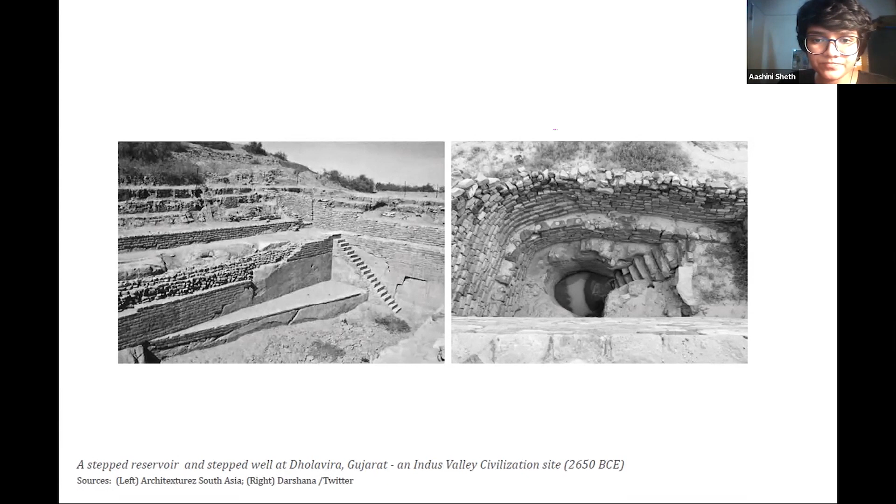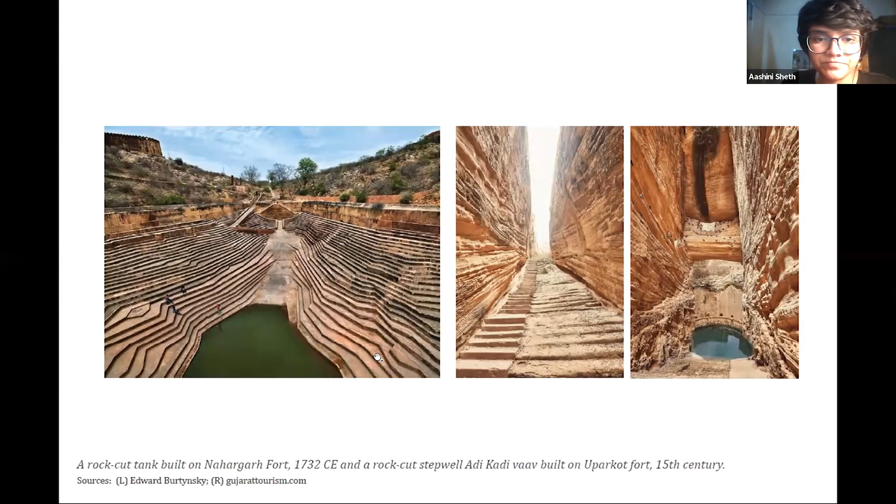However, in this context, it's important to acknowledge that the architectural vocabulary of water structures that evolved in this region is not exclusively for surface water and groundwater. We have a whole range of structures that navigate different kinds of water sources. So from this point on, I'm going to take us through a journey from surface water to groundwater and everything in between.

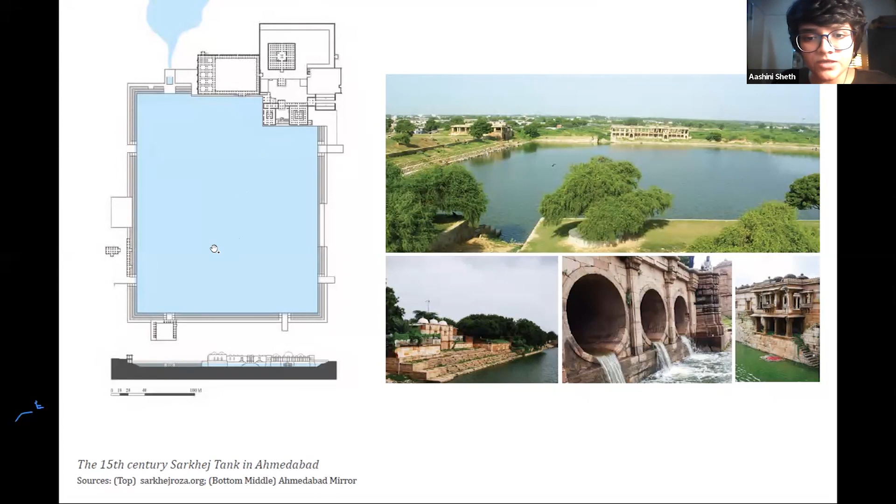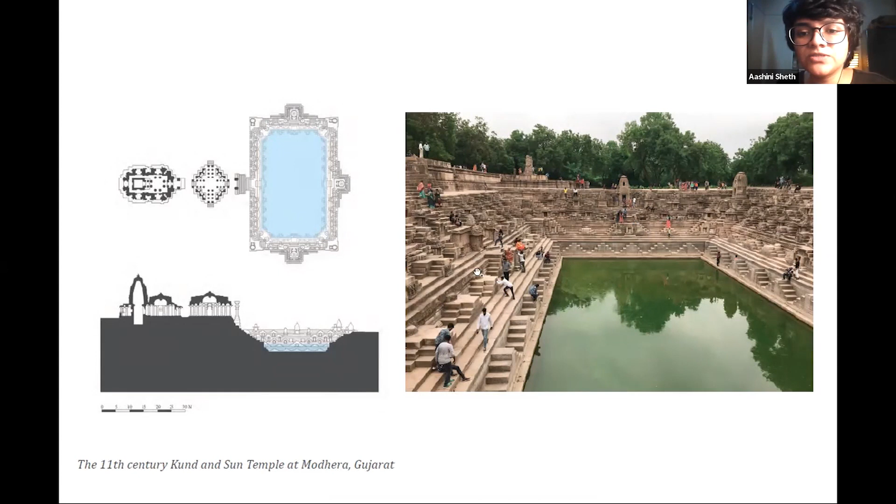This tank is situated in a pretty elaborate architectural setting, next to a complex of temples, and it has little miniature shrines erected all over the landings and steps of the tank. The repetitive, rhythmic movement of the steps also alludes to the ritualistic aspect of pilgrims circumambulating the tank and visiting each shrine as they go along.

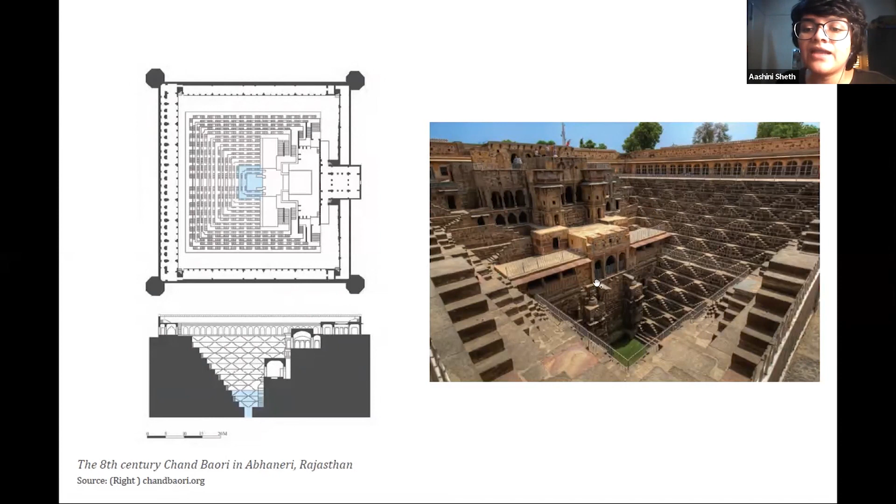This is another alteration of the kund. The structure is similar—it has these terraced, stepped walls—but it's a whole lot deeper than the last structure we saw, again in an effort to lose less water to evaporation as you increase depth but reduce surface area. This structure actually has a little shaft of groundwater. So it collects rainwater during the monsoon, and as the rainwater evaporates over time, one can still walk down to the greater depths and access the water that comes out of the ground.

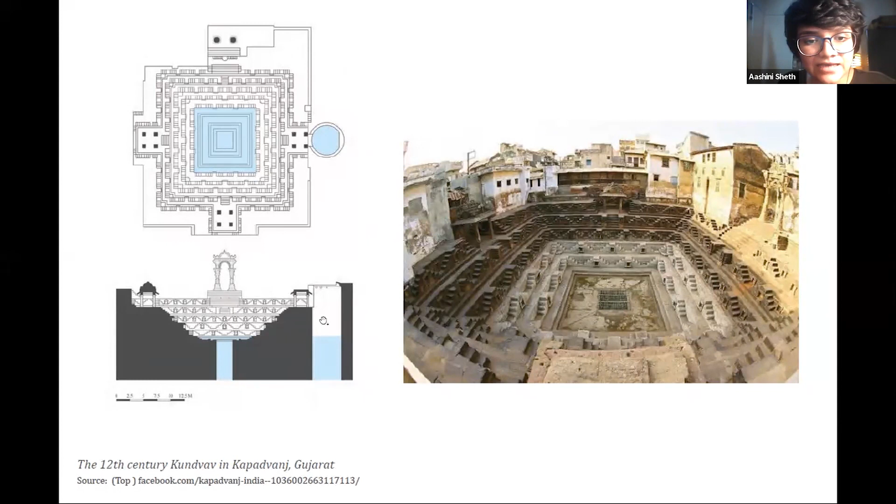This is another example of a kund, in Kapadvanj, Gujarat. It's similar to the Modhera tank in depth, and again has a lot of little niches and shrines carved into it. There is a monumental gateway which sets the stage for the tank. But you can see it has two attached well shafts—one at the base of the tank itself, and one built around one of its sides. So here the tank and the well begin to take on two very distinct identities.

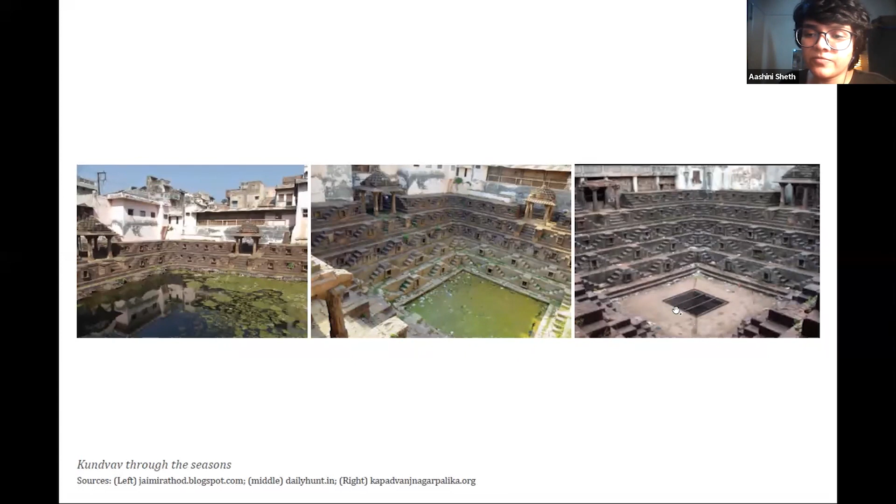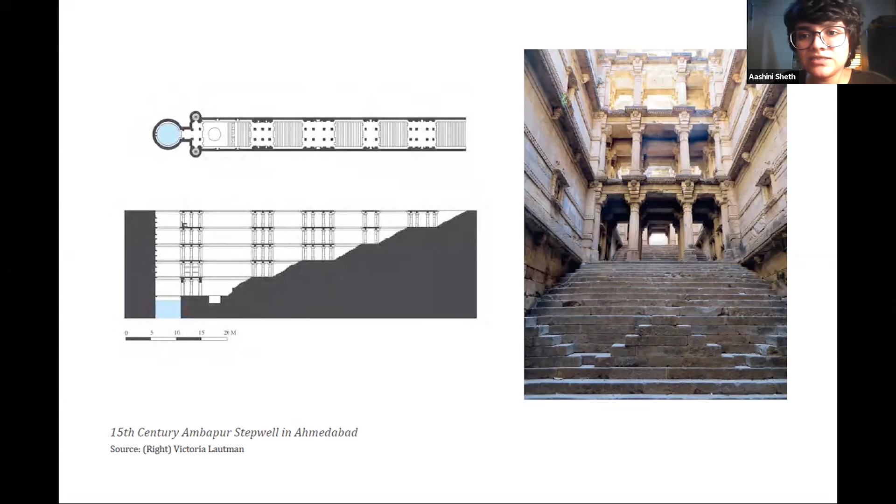There you don't see the sculptural splendor that you did with the previous well in Patan.

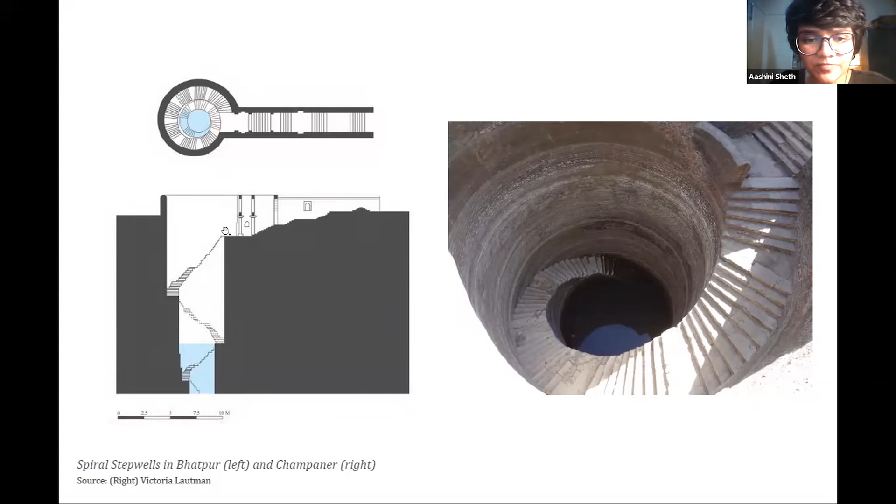This is the well form as it gets even simpler and more rudimentary. What you see here is a step corridor which, as it reaches the well shaft, begins to spiral helically within itself. So the component of the stepped corridor is becoming less imposing. And finally, here we see the spiraling taken to its epitome.

This is a well known as Hario Kuo in Halisa, Gujarat. Basically what you have here is a spiral stepped corridor that winds around the well shaft, and there are these little balconies that look in towards the well. So it's a very insular, very private expression compared to these large public stairways that we saw in the previous versions.

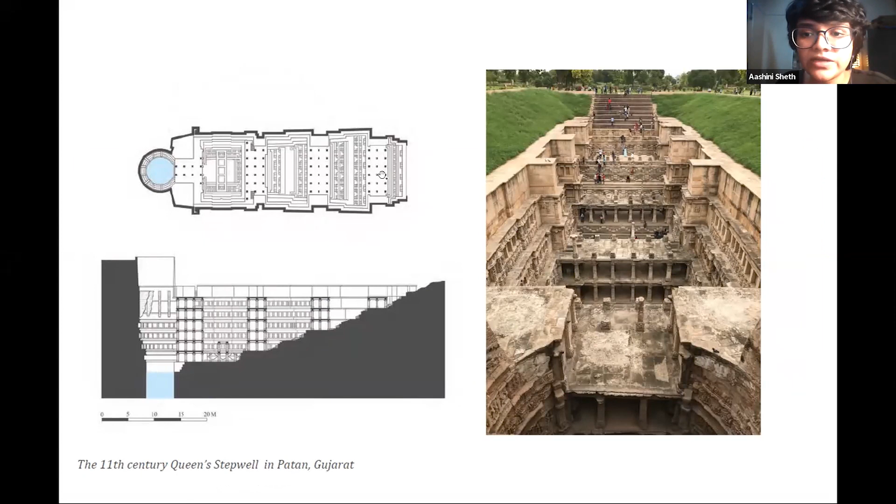Also, with previous step wells, for example the Rani Ki Vav, you can see how the step corridor is quite large, broad and deep, so it has a lot of potential even for holding rainwater when it rains in the monsoon. But with something like this, its scope has been reduced to merely acting as a well. It does not have much scope for storing water like a cistern, the way the Rani Ki Vav, the Queen Stepwell, would have done.

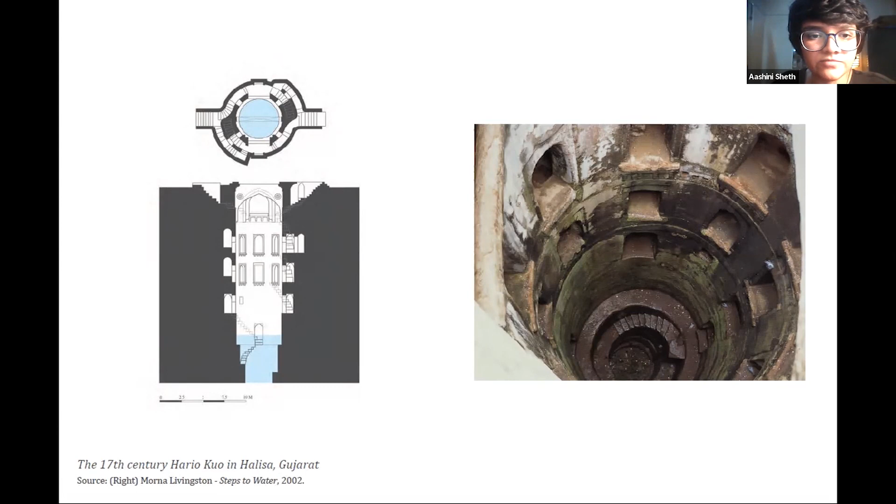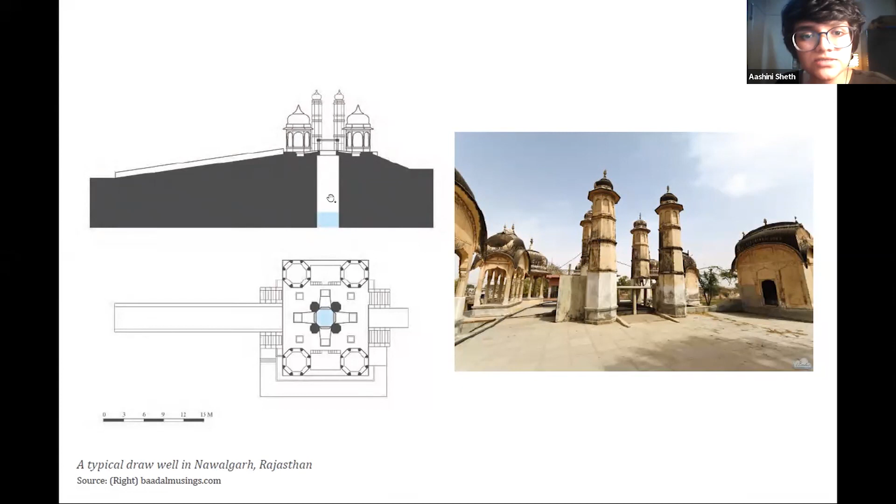Finally, here you see a very simple, rudimentary draw well. All you have is a cylindrical shaft that goes into the ground, and this is very typical of the Shekhawati region in northern Rajasthan, which tends to be much drier and more arid than Gujarat. You have these long ramps for a draft animal like a camel or a bullock, which would drag a rope with a pulley and pull large quantities of water out of the well. So you begin to see an inversion in the section — instead of a section that goes in towards the water, here it's a different expression which is more outwardly.

Finally, what we see here is a rainwater cistern — basically a tank excavated beneath the foundations of vernacular house forms in certain cities in Gujarat, like Ahmedabad. The typical vernacular house form typology in Ahmedabad tends to be these courtyard homes, and very often there's a cistern excavated under the courtyard. The rainwater which falls on the sloping roofs is collected through a pipe and stored underneath the house itself.

There is a little shaft through which, as you can see, this woman is, with a pulley, inserting a little bucket and pulling water out of her own private cistern. This is the other end of the spectrum from the Sarkhej tank we saw right in the beginning — it's private, small, scalable and modular. We find about 10,000 of these cisterns throughout the historic city of Ahmedabad.

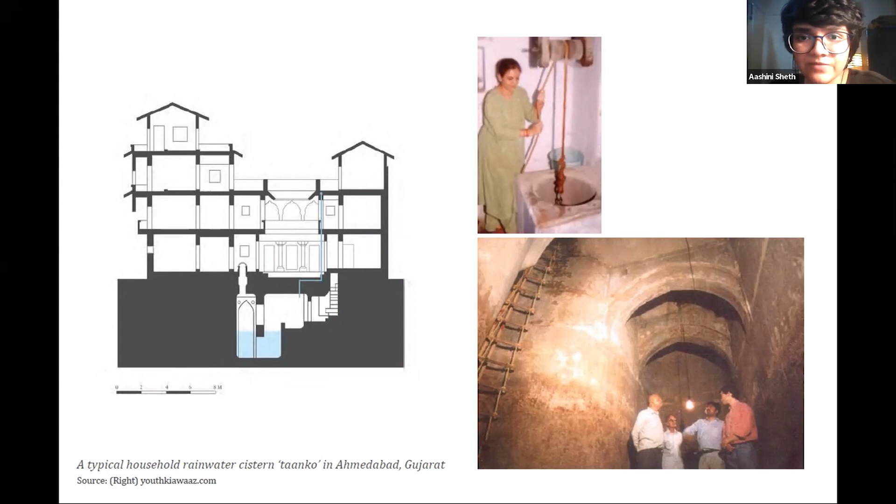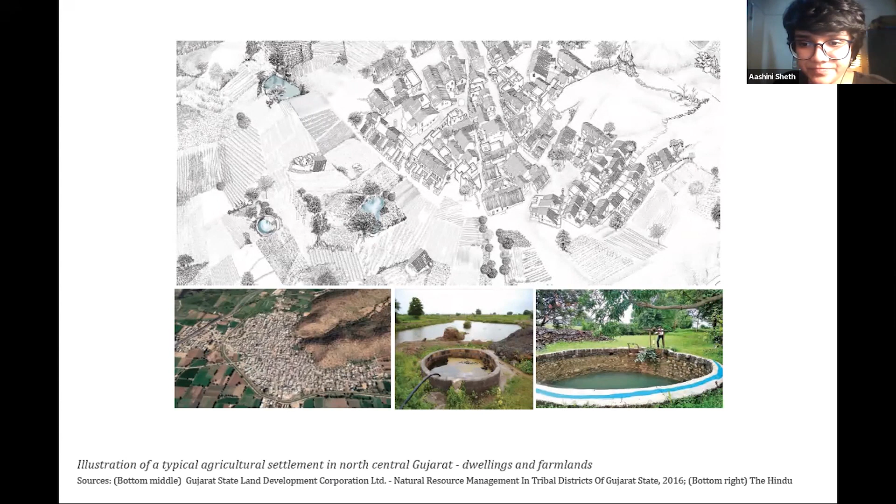As you walk further below to even lower land, most of these agricultural settlements tend to be located next to natural ponds. So we see one such condition here. The pond is a little bit of a walk away from the settlement, and typically the villagers who live here use the water of the pond for a variety of functions.

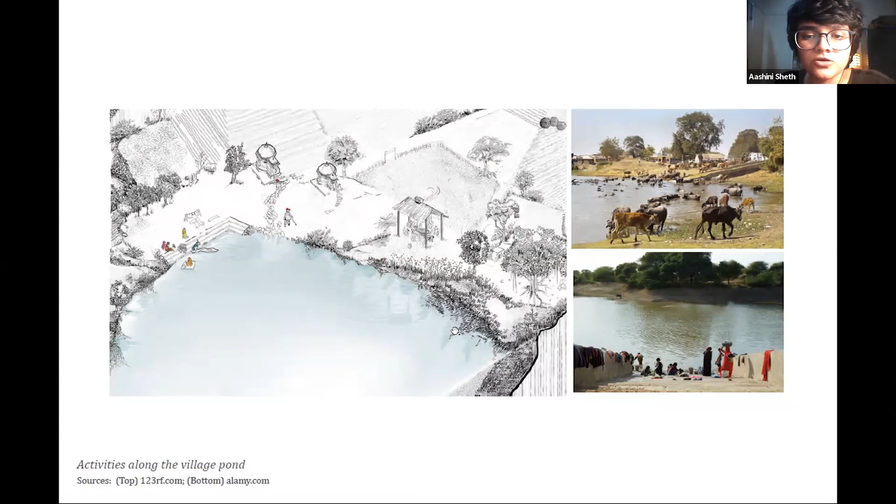So there were a very specific set of functions reserved for the natural ponds, which typically involved some form of organic waste. When you have animals coming in to bathe, or people dyeing clothes, it's natural that the water is not going to be of the best quality.

So in this case, for most settlements, they don't just rely on natural ponds—most settlements tend to prefer wells and stepwells as sources of drinking water. Typically, between a pond and the settlement, you would find a stepwell located.

It's important to note that, as opposed to a simple dug well, a stepwell has a much greater programmatic function as a social and public space. Stepwells would be frequented, of course, by women who came to fetch water, and they were often one of the few public spaces where women could congregate in historic societies.

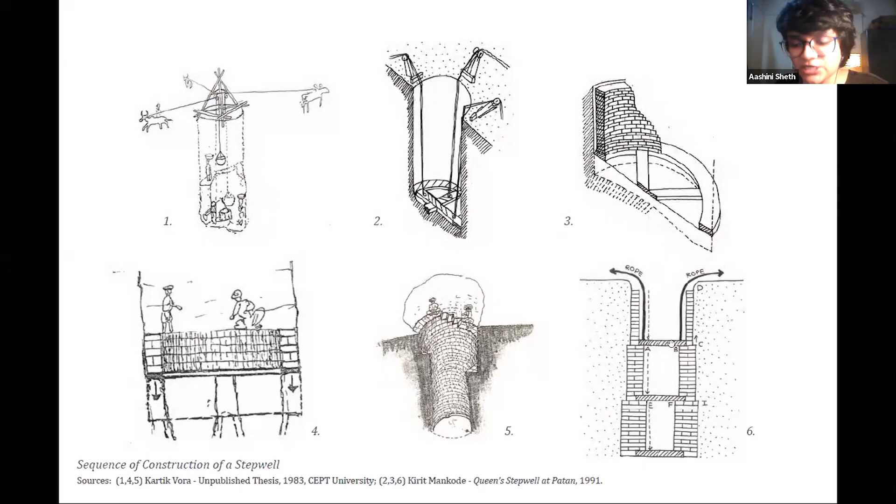As far as the step corridor is concerned, they would dig the excavation, and the earthen walls would be shored using some form of scaffolding, or sometimes mounds of soil. They would assemble these stone pavilions tier by tier, constructed using mortarless techniques.

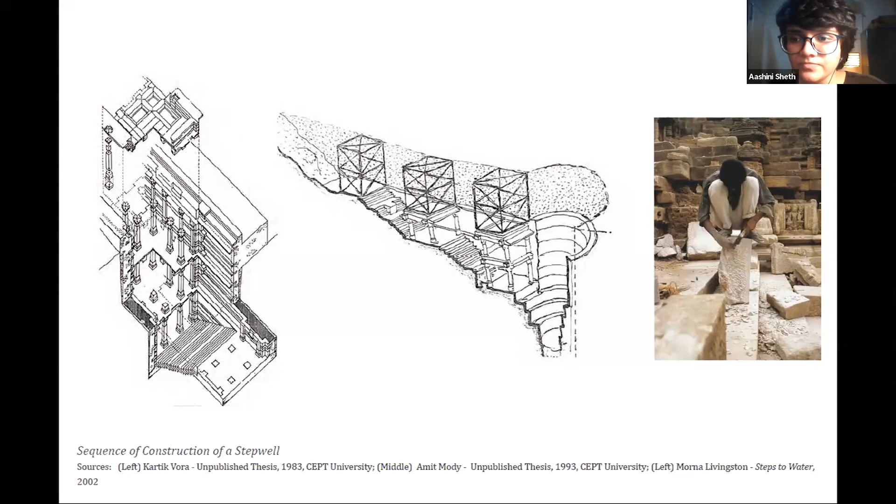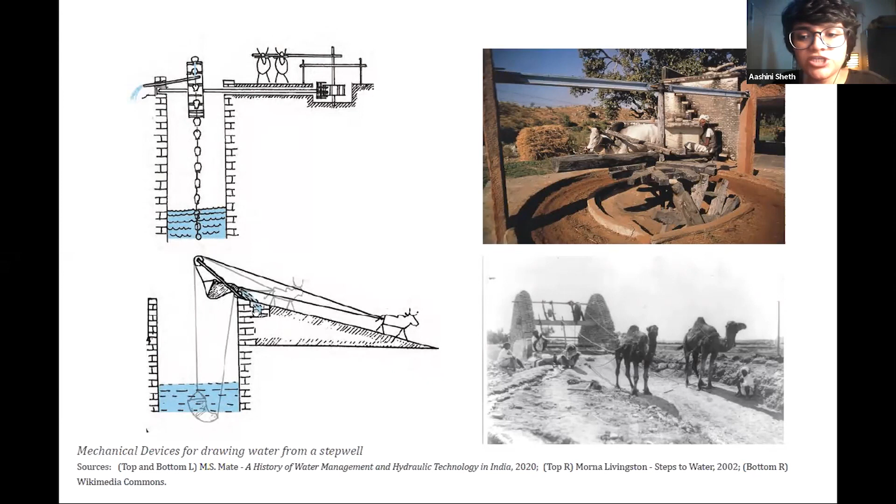As far as the social mechanisms of water distribution are concerned, there was a community of people known as Bishtis, whose main occupation was to fill water from stepwells. They would fill it in large leather sacks and go around offering water to people.

This is a phenomenon typical of certain urban centers. You wouldn't find this so much in villages or small towns, but in big urban centers you would find them. Typically you'd also find these Bishtis moving along with traveling caravans, carrying water for traders or soldiers as they traveled long distances.

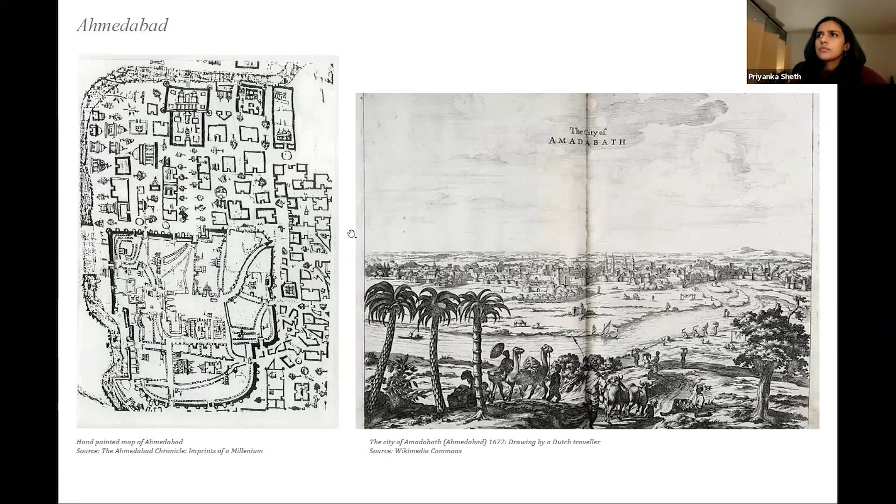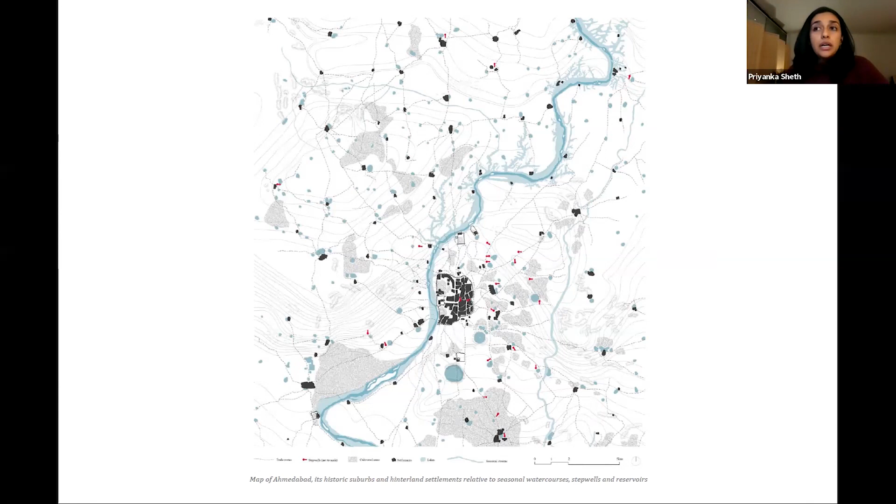The citadel was strategically situated on the eastern bank of the river. Stepwells were also built within the walled city and outside of it, where these historic suburbs or hinterland settlements and villages were. This map shows these little settlements outside the citadel. To make this map, we looked at historic maps and travelers' accounts, and superimposed the stepwells that we documented onto the terrain. So in a way, this map conjectures the historic and pre-colonial landscape of Ahmedabad.

Satellite imagery was an important method for us to identify the former historic settlements, and more importantly, the adjoining reservoirs and ponds, which often indicated the presence of stepwells. Many of these lakes have been filled in or built over. To locate these stepwells, we would first locate the reservoir or pond, which you can see as little blue dots in the landscape, or rather urbanscape now, and then go to that location to look for the stepwell. Very often we would discover that the stepwell had been built over or buried.

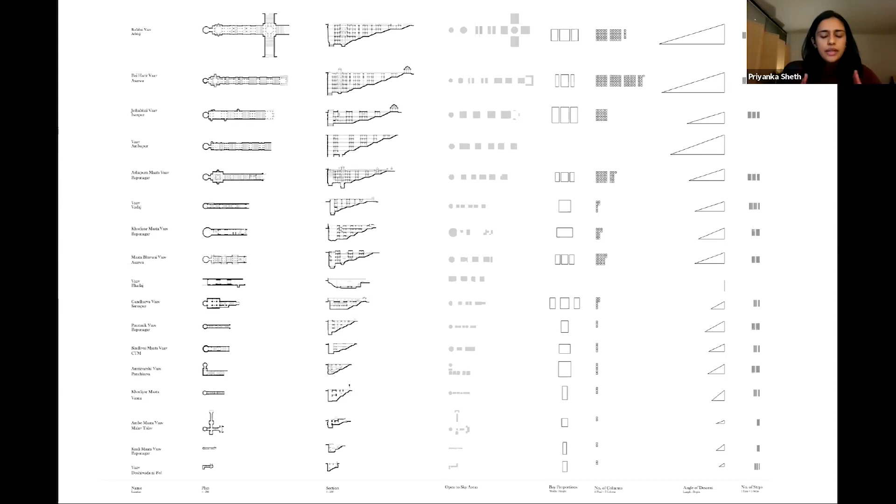We noticed that those within the walled city were typically smaller than the ones outside of the historic urban core. In these diagrams, you can see the open to sky areas that we diagrammed, the bay proportions in the short section, the number of columns in the stepwell, the angle of descent, and the number of steps. The fewer the number of columns, these structures were actually supported by arches. So there is a variation even in the structural systems that held the stepwell, and the walls as braces.

I'm going to now get into the current condition of the stepwells in Ahmedabad, with some specific examples. This is the Rudabai Vav in Adalaj, which was built in the 15th century.

Aashini showed some pictures of this, and it's intricately carved, one of the few stepwells that we looked at that actually had water. Now, Adalaj was an artisanal village and a crucial halting point along the trade route to the port of Khambat, further south on the coast, and it was an important textile center.

The stepwell is intricately ornamented with exquisite sandstone carving, featuring patterns, animals, and figurines. It was commissioned by a noble woman, Rudabai, and an inscription in the stepwell states that the patroness provided funds from her own personal treasury for the construction.

Many of the stepwells in this region were commissioned by women, and this has been wonderfully elaborated in the work of the scholar Dr. Purnima Mehta Bhatt, whose work we have referred to extensively. What was striking was that she emphatically challenges the historical stereotype of women as passive by shedding light on their agency as patrons of these fabulous structures, and frequently as the sole donors to the stepwells.

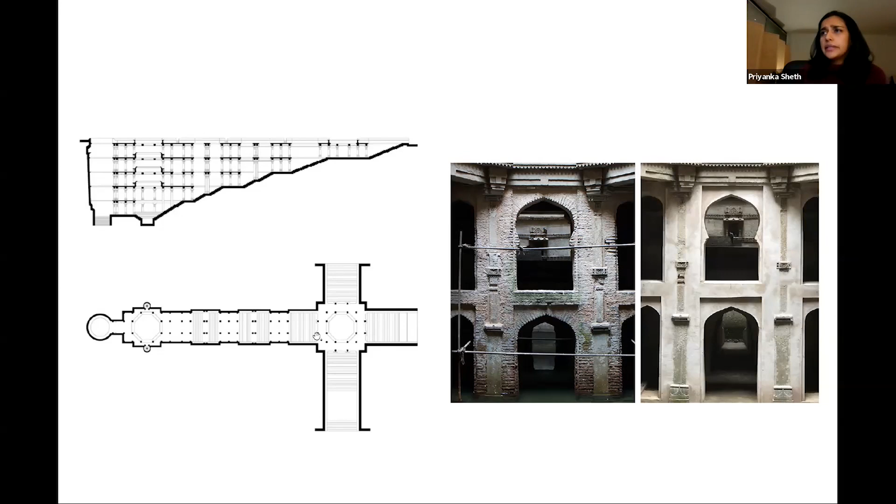This is another stepwell that we documented called the Bai Harir ni Vav in Asarwa, and like the stepwell in Adalaj, it's intricately carved. The inscription suggests that it was commissioned by Bai Harir. Now, while her identity is contested, most historical accounts say that she was the female superintendent of the Sultan's harem.

The stepwell is also maintained by the Archaeological Survey of India. And as you can see in this picture from, again, the 19th century and 2018, the structure is more or less unchanged.

And this drawing shows the stepwell. You can see it goes down 5 stories. It also is adjoining a mosque and the tomb of Bai Harir.

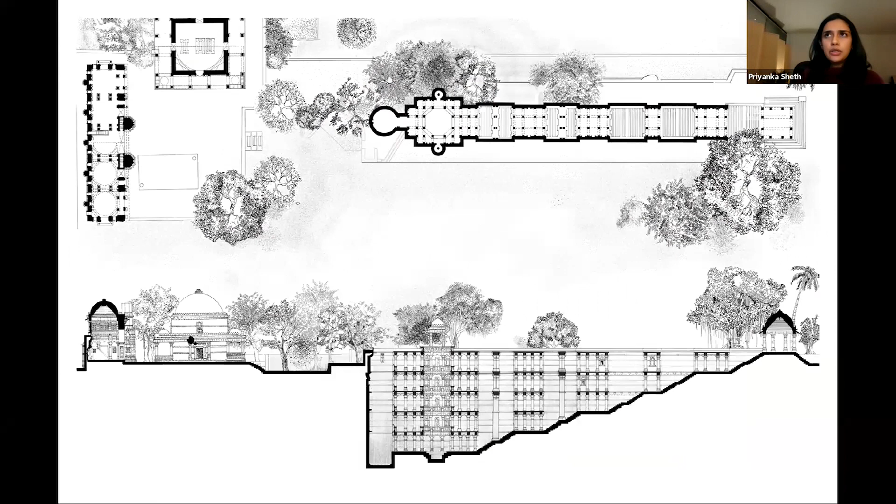This one is called the Jethabhai ni Vav, and it can be traced to the historic suburbs outside of the walled city that I mentioned earlier. It was built in an orchard in the 19th century, in a suburb well known for its fruit produce, so the stepwell actually irrigated an orchard.

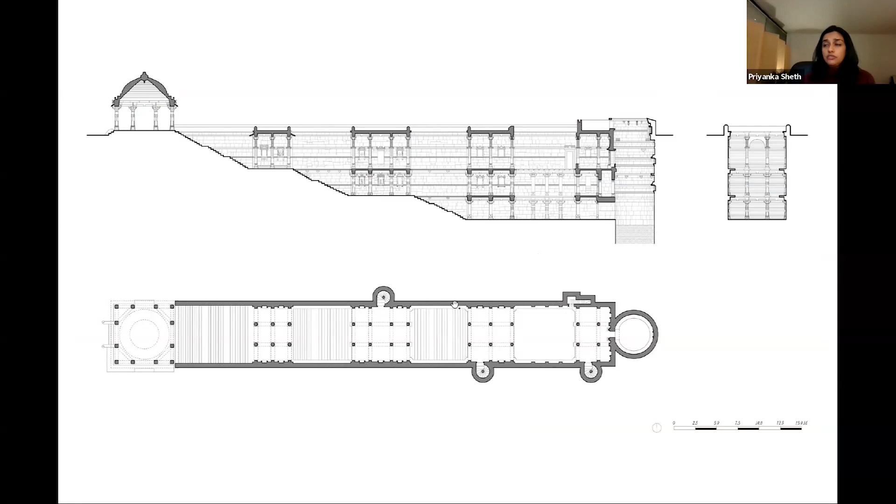In this drawing, the historic photo I showed had the water level up here where my cursor is. When we went, you were looking at the lowest level right there. So that's the level showing how much the water has dropped.

This is the last of the preserved stepwells where the state is the stakeholder, preserved by the Gujarat Archaeological Department. It has distinctive arches which brace the parallel retaining walls, and it was built in 1723.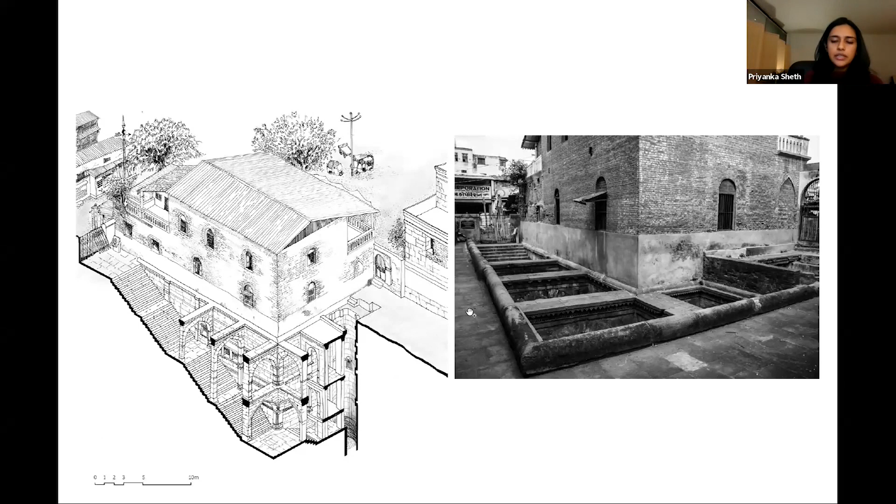You can see the L-shaped configuration of the stepwell more clearly in this drawing. This one is also, interestingly, within the walled city, so it is rather compact. As I said, stepwells within the walled city were typically smaller than those outside it. A colonial era building sits perfectly within the L-shaped configuration, so there has been a lot of building over of stepwells, and you'll see more explicit examples of that.

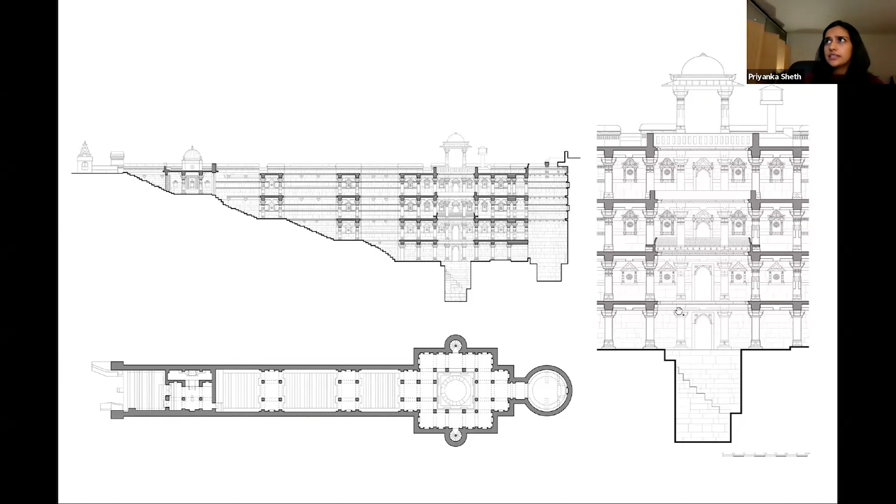Now we get into another stepwell which is also a temple dedicated to a goddess, called the Mata Bhavani Vav. It's an 11th century stepwell housing many small shrines all along the stepped corridor starting from the beginning. You can see recent figurines of the goddess, tiled images of the goddess on the wall, so this is a more explicit conversion of the stepwell into a temple. In the well shaft is the main shrine to the goddess, with additions of shrines and pots all along the stepped corridor.

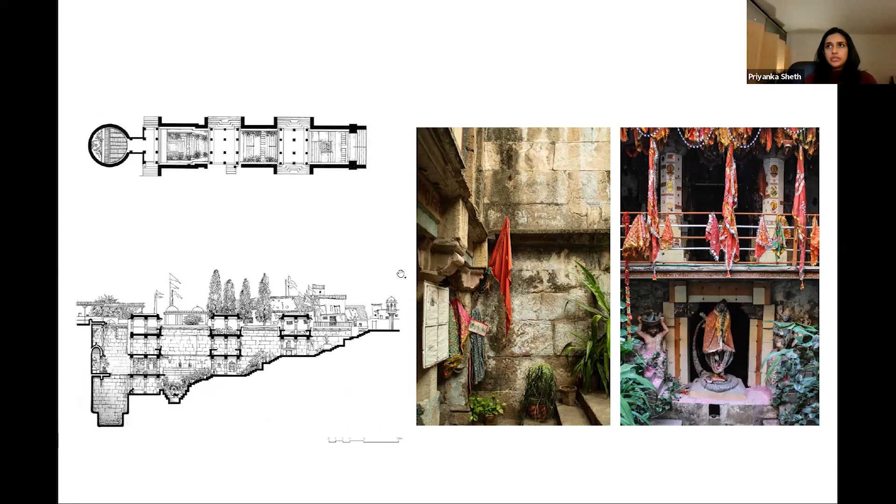This is maintained by the community residing around the stepwell, who lovingly take care of the place, and it's thronged by pilgrims throughout the year. This is the last of the stepwell temples I'll show, an example where the well shaft is intact, but the rest of the stepwell has been completely transformed, unrecognizable as a stepwell.

These are the figures of the female deities in the Khodyar Matani Vav, and the well shaft is again intact, much like the well shafts we've seen in some of the other stepwells. We were stunned when the priest of this temple opened this little door and revealed the well shaft to us, and we were thrilled to see it intact. In this drawing, you can see the additions made for the purpose of the temple: the figures of the goddesses, shrines, metal railings and whatnot, while the well shaft itself remains intact.

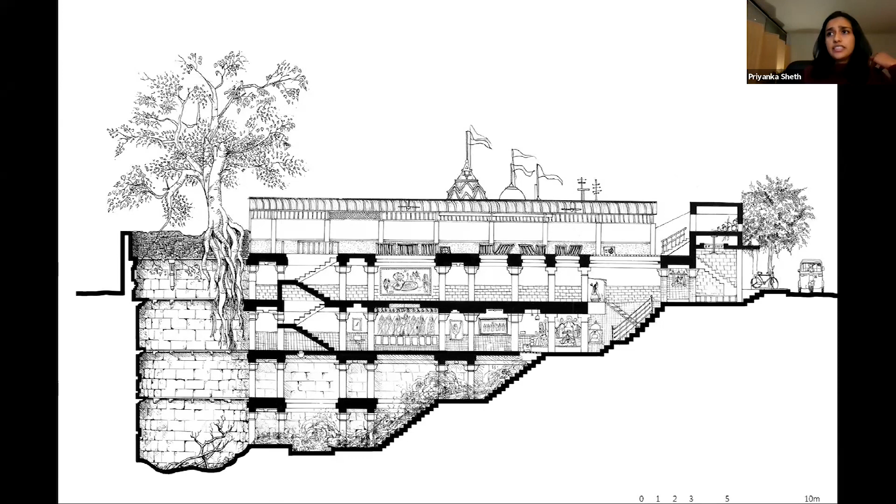So while the stepwell itself is unrecognizable, in this section you can still see the diagram of the stepwell. Of course, the open-to-sky volumes have been filled in by these continuous slabs. So a lot of the original structure has been altered, but these columns are still intact.

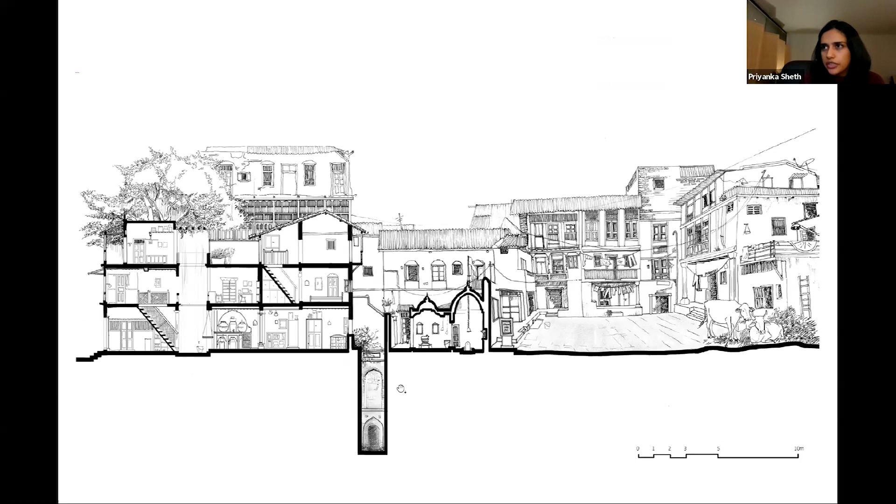Unfortunately, on the other end of the spectrum, you can see stepwells like this in the walled city. This one lies in a neighborhood called Doshivada Pole, one of the historic neighborhoods driven by community identity in the walled city. This stepwell lies on private property, uncared for and dilapidated. The stepped corridor is inaccessible, and our team had to literally jump into it from the parapet wall to document it. In this compact brick structure, water was previously drawn from this narrow well shaft. This is the short section via the adjacent courtyard, and unfortunately it serves as a neighborhood dump and has been partially built over. The drawing shows how narrow the stepwell is within the dense fabric of the walled city.

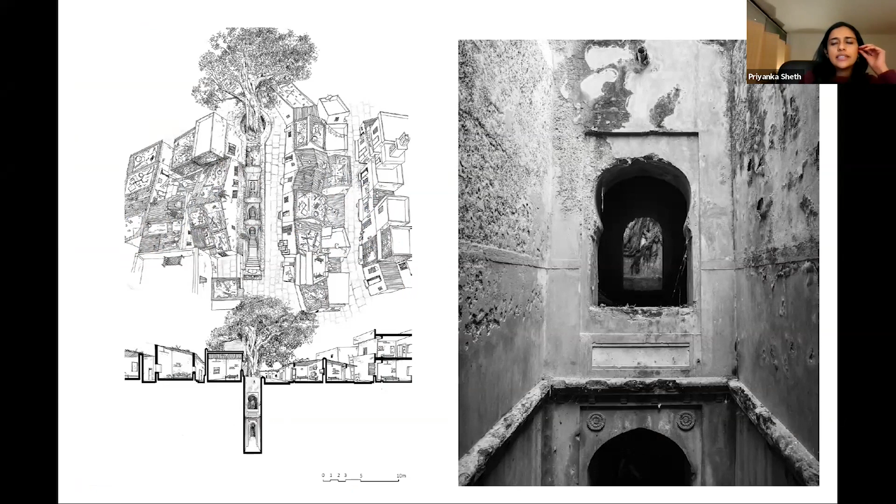Within the informal settlement of Vasna, another neighborhood in Ahmedabad, there is again a very narrow and modest structure. I remember when we tried to trace this stepwell, we were told about it while at another stepwell, and the priest there said, 'Why don't you go look for this one?' He gave us these nebulous directions. It has an inconspicuous approach through a recycled furniture shop, and the narrow streets made it rather difficult, but we were super excited when we found it and eventually made it there. Unfortunately, the stepwell itself is squalid; however, this beautiful banyan tree has grown over the well shaft, and you can see the settlement around and the narrow streets that led us there. So the apathy towards this structure is evident, and it has unfortunately not been integrated into the social fabric of the neighborhood.

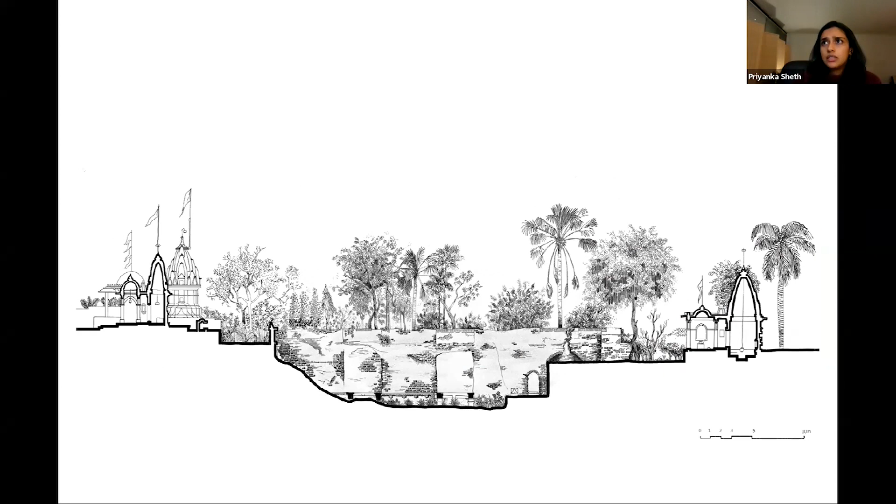So what I did was cover the spectrum of the current condition of the stepwells in Ahmedabad and what we have documented for the exhibition. It varies greatly, and what we have observed falls broadly into categories of preservation, inhabitation, disintegration, and ruination. However, all the stepwells we documented have been severed from their former ecological and social networks—well, not always; in some cases both, because the presence of the temple still indicates the presence of a social network, if not the ecological one. So whether museified as a touristic center maintained by state agencies, or dilapidated like some of the examples we saw, these stepwells are at risk of being forgotten as providers of the fundamental need for water. That's what these structures were for. When contemplating the future of their legacy and heritage, with shifting notions of function and identity, it's important to remember the larger ecological patterns of water harvesting structures unique to this region, which Aashini showed in her presentation, and which the stepwells in Ahmedabad are also indicative of.

So that ends this part of the presentation, and I will hand it over to Tanvi to talk about possible futures. Thank you.

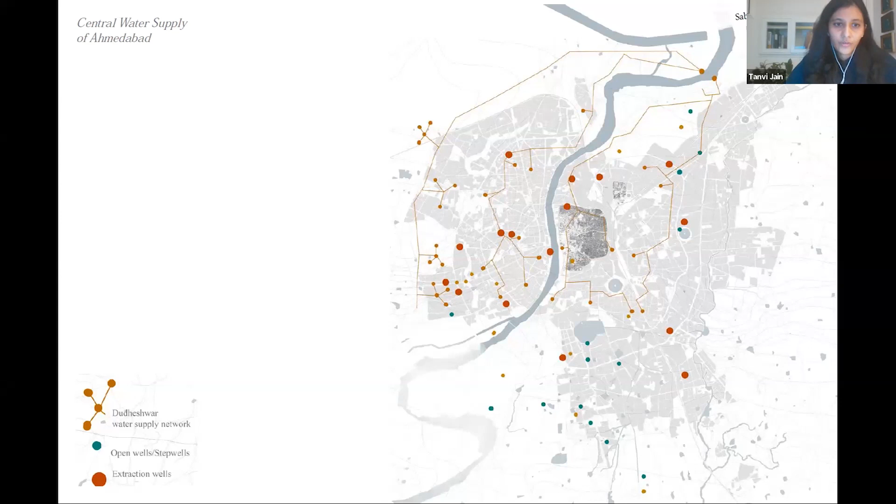This idea of centralized supply is based on the paradigm of water usage, which is essentially underscored by the wishful idea of limitless fresh water, available as a civic right and guaranteed by the state. Now, this complete dependence on the state for water also makes its supply a tool for political manipulation, which increases disparity and inequality around its access.

This mega infrastructure paved over the natural river floodplains and has fundamentally altered the ecology of the Sabarmati River. It uses water politically for image making, and the river land is used for commercial finance generation at the cost of disrupting the seasonality of the river flow.

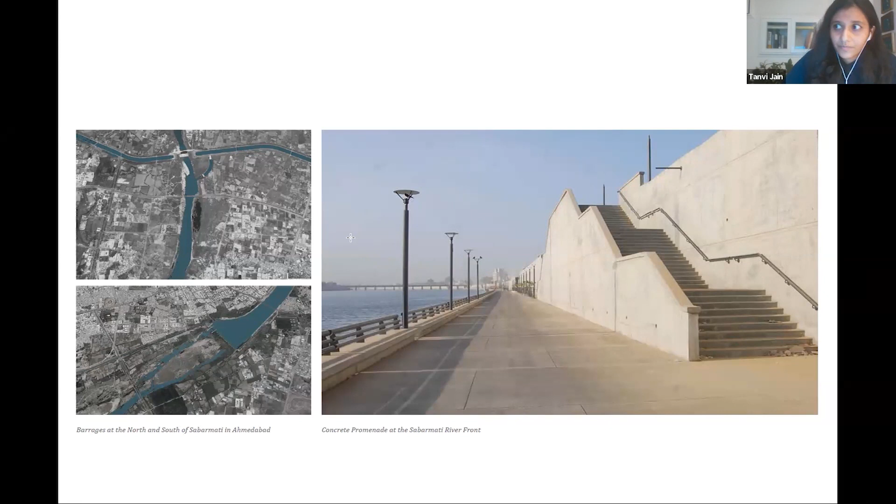This diagram shows how the river was first seasonal, and then, because of the concreting and getting perennial water supply, it now always has water.

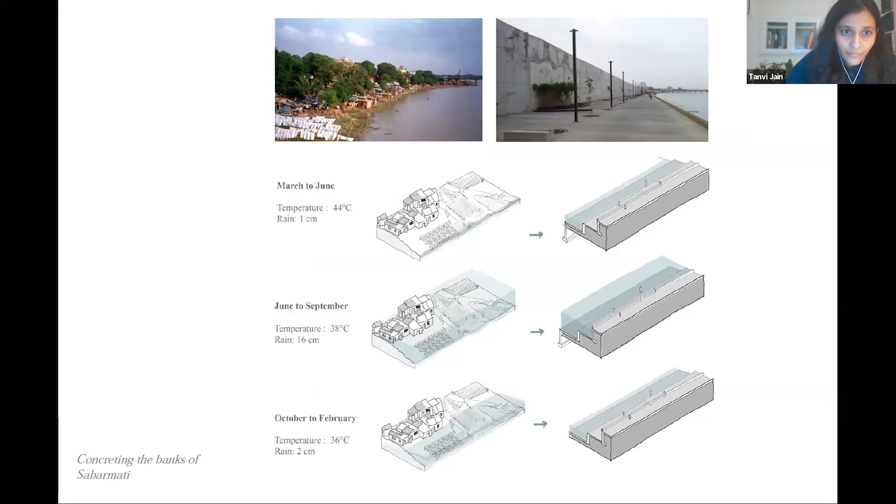The next section discusses the way forward. As we plan for such infrastructural developments, we need to question attitudes toward water that are premised on indefinite extraction and central provision to support urban expansion.

These are some potentials within Ahmedabad to rethink policies and strategies of water management, rethink our attitude towards water, and imagine an alternate mode of urban design. These explorations are speculative at the moment; the idea is not to replicate the stepwell or its form, or suggest an impossible return to past practices, but to argue for a third way forward in which both the historical complexity and the growing demand of a burgeoning population are acknowledged.

The first point talks about collecting water where it falls, essentially collecting the rainfall. Rainwater harvesting, interestingly, lies at the intersection of social, ecological, and architectural concerns of water management.

In Ahmedabad, unfortunately, sparse efforts have been made, but they haven't gained widespread traction due to continued focus on centrally supplied water and building monolithic infrastructure to make central water supply possible, as shown earlier. The potential, especially in the old city of Ahmedabad, for rainwater harvesting is enormous.

As Aashini talked about in the first part of the talk, every traditional house within the walled city has a rainwater cistern. Their restoration can represent a substantial additional source of water for the city.

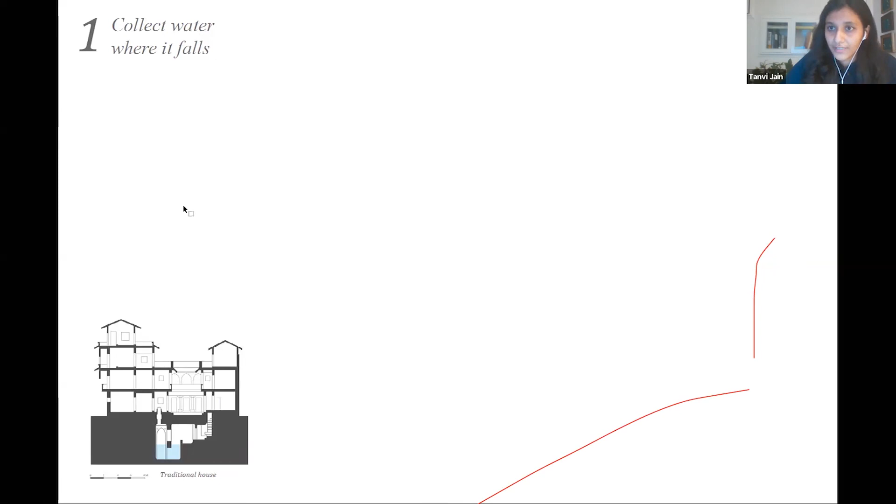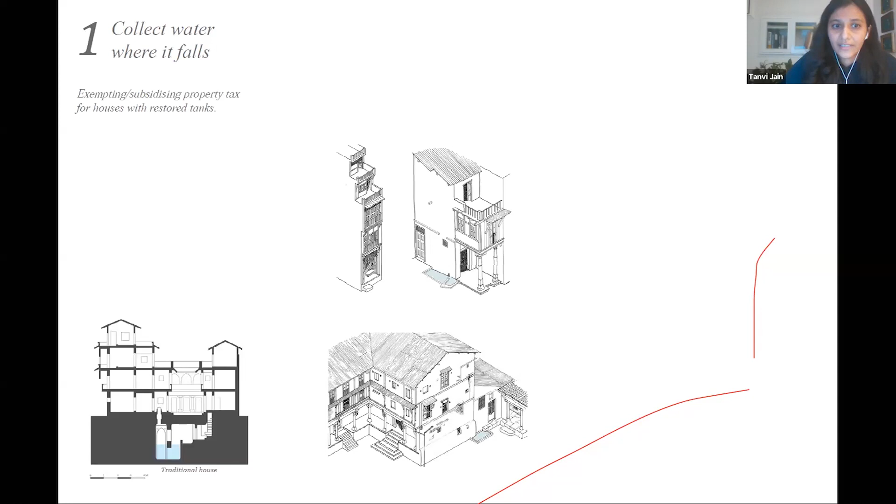Policies such as reducing property taxes for houses with restored tanks can be positive steps toward incentivizing their implementation. This existing system of approximately 10,000 documented tanks, each with a capacity ranging from 15 to 20,000 liters, was sealed during the colonial period and can easily be revived.

New houses and neighborhoods must also be designed with collection tanks and recharge wells. Harvesting tanks can also become significant spatial features, exploring ideas of passive cooling and the way water moves through the house, and these ideas could be explored further to evolve a building vocabulary for the region.

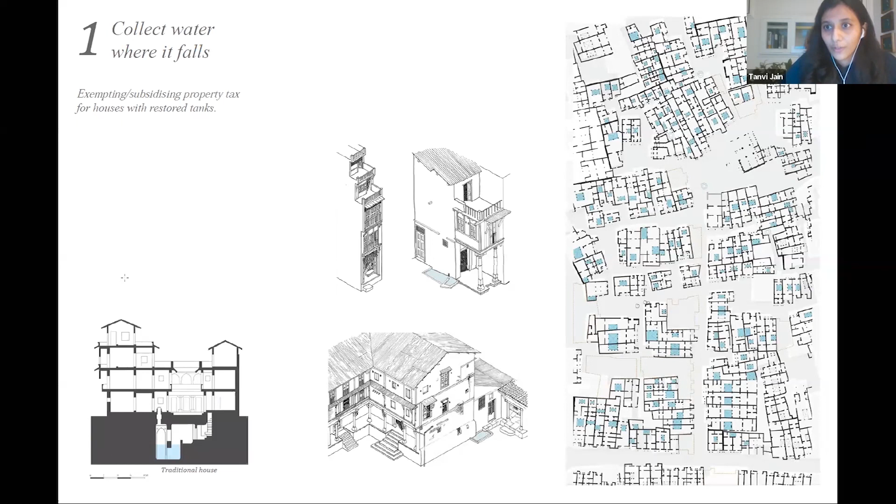Larger tanks in medieval institutions within the old walled city can also be revived as shared community resources. Stepwells in dense neighborhoods can be desilted to function as community cisterns by collecting roof water and street runoff. Here's one example that has been illustrated.

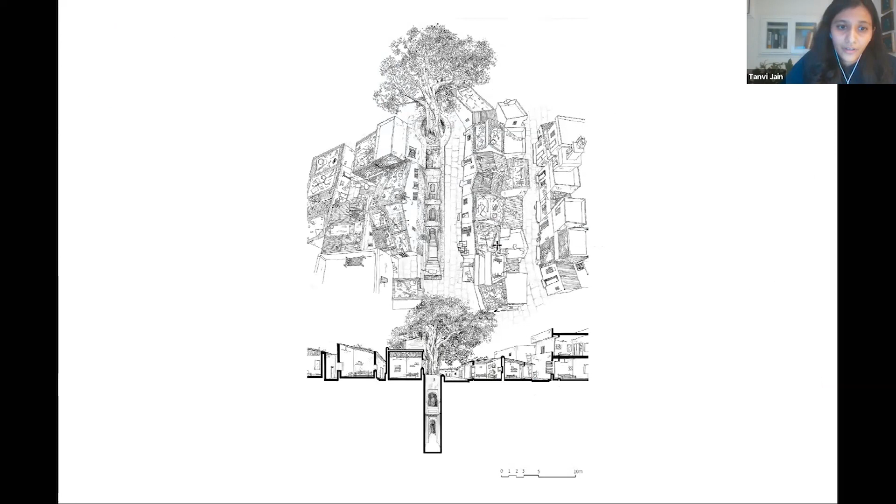This stepwell, which Priyanka talked about earlier, is in the neighborhood of Vasna in Ahmedabad, and an informal settlement has grown around it. It is proposed to be reactivated as a parallel infrastructure for water harvesting.

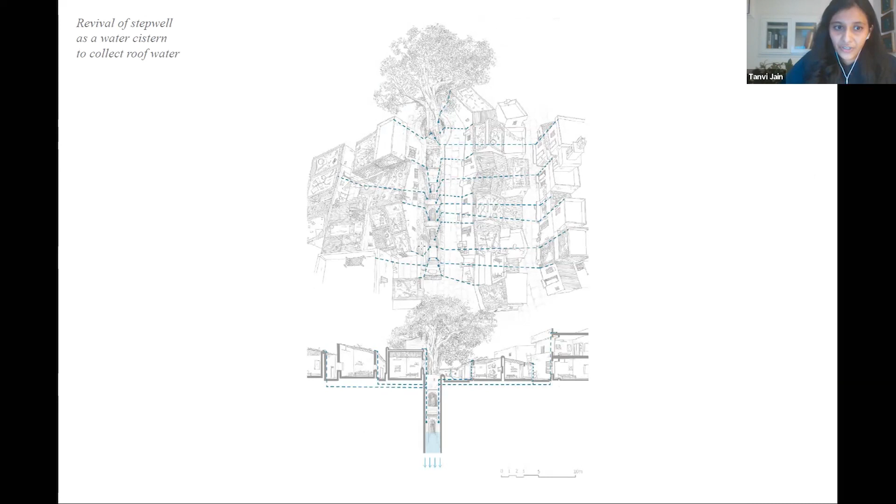Such a revival will save significant expenditure on infrastructure installation from scratch, and collected water can be redistributed for non-potable purposes in houses, and also create productive terraces.

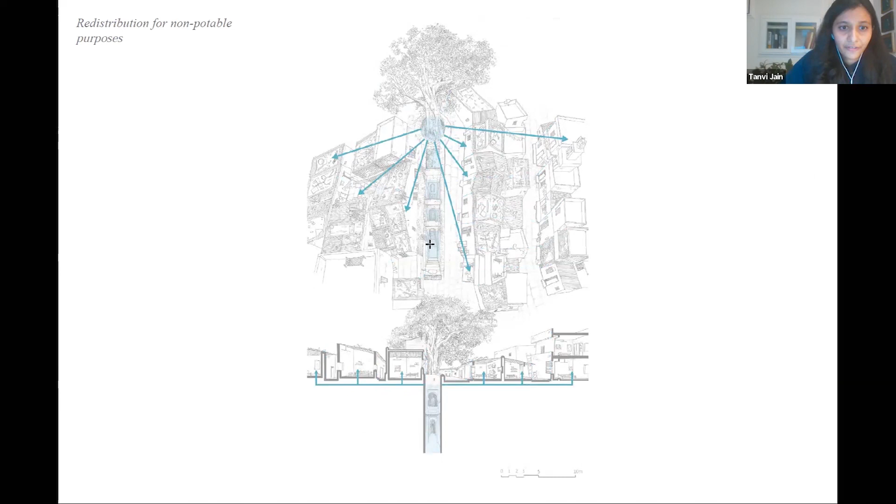Community water cisterns can also become the basis to build new neighborhoods and localize water collection.

Like Priyanka and Aashini both touched upon, women in the subcontinent are indisputably responsible for procuring water needs of the family. As reported by the UN, they are more vulnerable to acute water stress, but they're also the first responders in times of drought. Therefore, they are well positioned to be active stewards of shared water resources as we confront this water crisis.

This was also reiterated by Ashok Chatterjee, a former advisor of the World Water Council, in a discussion we had in the first iteration of this exhibition back in 2016: that if women are not active participants at all levels of decision-making, efforts to alleviate the water crisis will not be as effective.

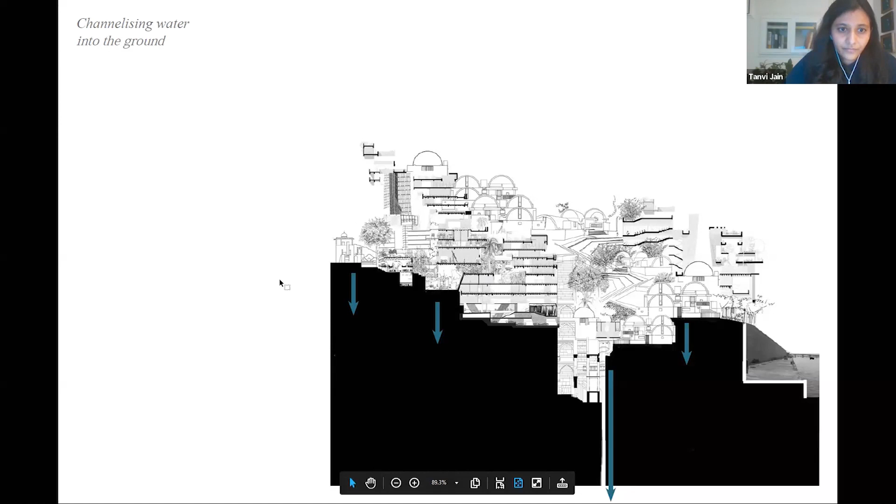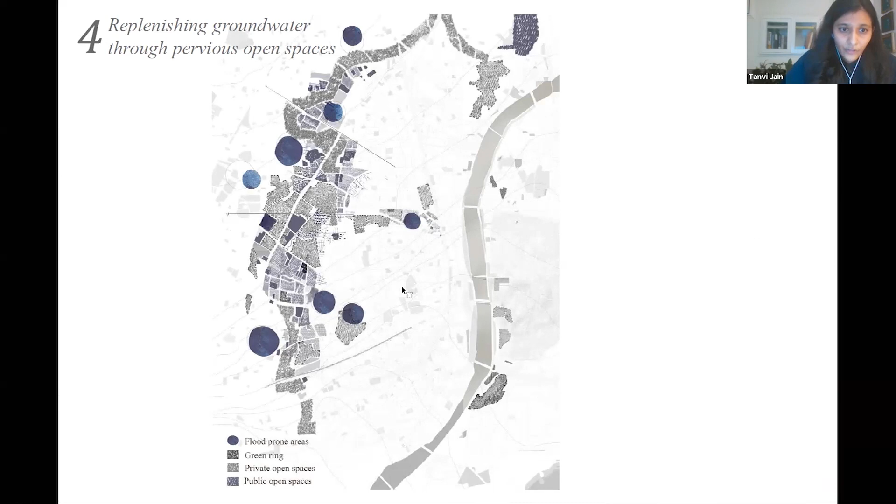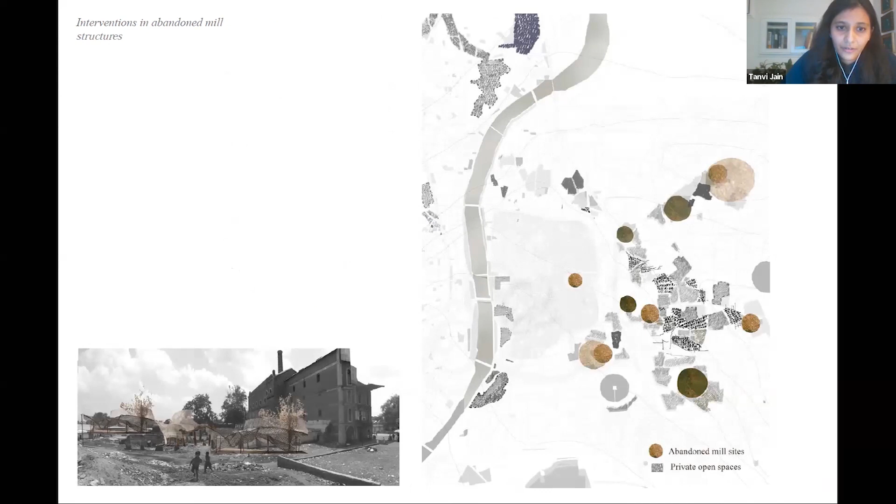Now, to achieve this better percolation and to recharge the aquifer, the low-lying areas on the west, which essentially forms the green belt, is proposed to be revived by banning building activities and replenishing groundwater through pervious spaces. On the east, the underutilized abandoned infrastructure, the textile mills, marked in yellow here at different sites, could be used to create landscapes that collect, filter, and recycle grey water.

This idea of decentralized small-scale water intervention is a counterpoint to a large and monumental architecture that comes from a singular idea that flattens diversity. As the rainwater harvesting structures that Aashini described in the first part of this talk, local idiosyncrasies led to certain water practices, and they became expressions of cultural form. Now, such attitudes towards water and water infrastructure can help evolve a vocabulary for city making that privileges practices over building monuments or creating spectacles, by making smaller interventions instead of big monolithic ones.

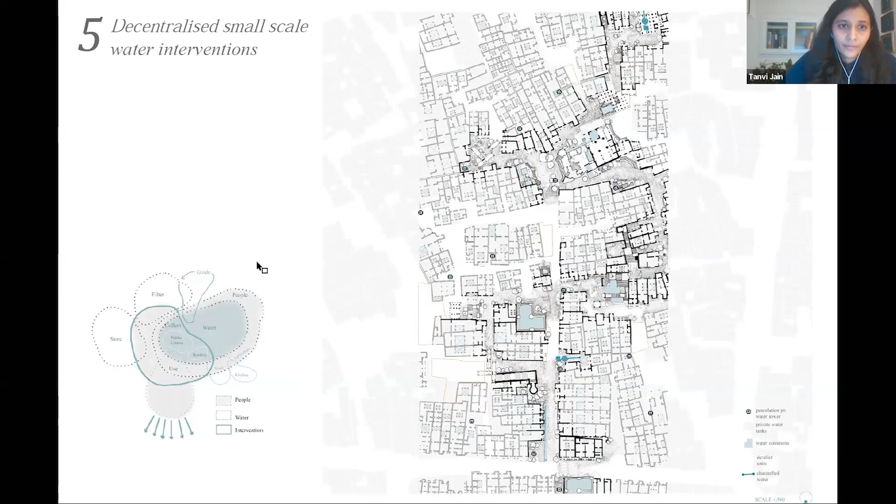It engages with seasonality rather than dominating over the ecology, placing an emphasis on small-scale responses that embody sensorial, seasonal qualities. The different types, scales, and locations of water structures like pavilions, percolation pits, and filtration terraces help evolve an aesthetics for an overall regional water system. And water, once again, becomes an active element of social space.

The pavilions and harvesting tanks can accommodate gatherings and spaces for people. And these interventions could easily be altered based on the changing mosaic of localities that benefit from a large range of efforts at various scales.

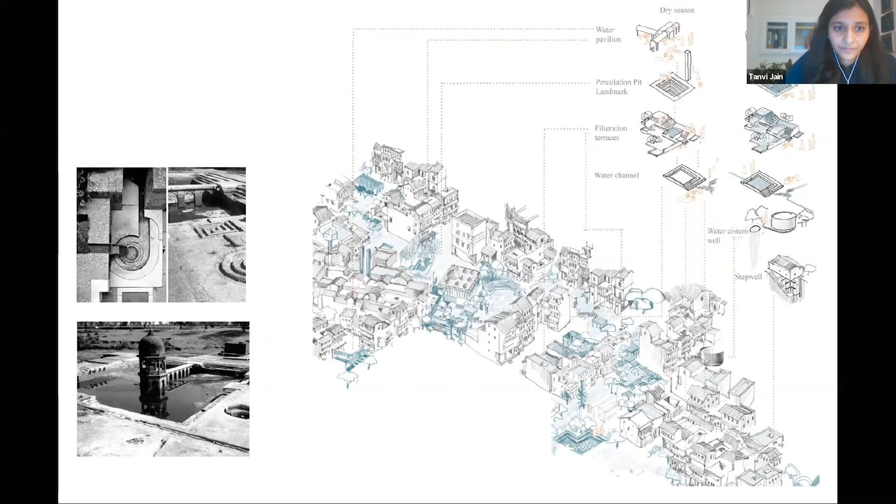Another thing that stepwells did, since they were embedded in the geography and showcased exquisite resolution to provide water, they elegantly engaged the community and crafts of a place. The visibility of water in stepwells and open wells signaled the approaching of summer or a time of plenty based on the water levels. This allowed the community to alter behavior and usage based on the signals of the wells.

Now, today, the traditional water harvesting structures have been supplanted by an engineered network of hidden pipes and bores that keep the water invisible and are devoid of community involvement or any craft practices as such. The loss of this signal is something we need to overcome with urban design, by making the invisible water and seasonal fluxes of water visible in our domestic and public spaces.

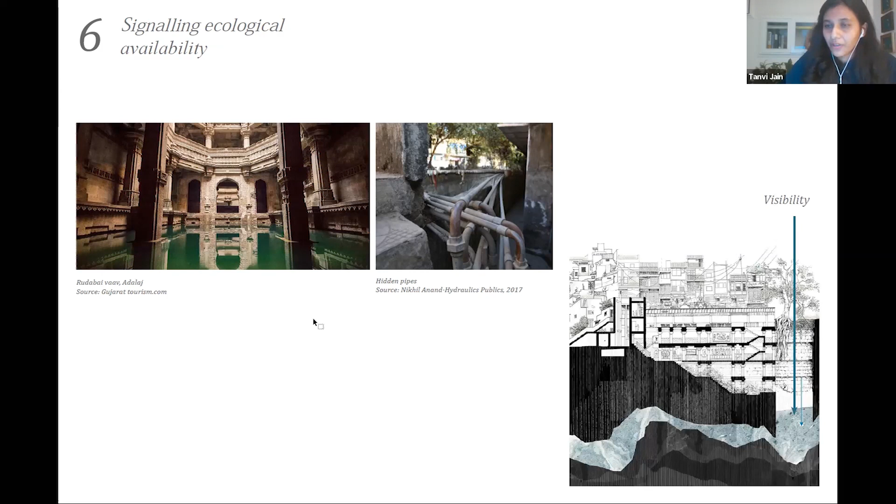This leads me to the last point. At the scale of a region, the shallow aquifer is actually a humongous water cistern for the city, which unifies the domestic, community, and urban scales. It has the potential to store rainwater and distribute it in a decentralized fashion, at a very low cost and at a very low embodied energy.

Now, it is tragic that transit infrastructure like metros ignore groundwater because it is invisible. What should be done is that urban groundwater institutions should be set up that recognize these linkages and regulate building activities, prevent the digging of illegal borewells, and therefore protect the shallow aquifer, and perhaps even recognize the aquifer as a living, breathing entity, like how the Ganga has been recognized.

Now, these shifts in attitudes and policies could steer a move towards a socially more equitable, more sustainable, and relatively more water-sensitive city that is self-sustaining and does not depend on transported water. So lastly, the key takeaway is that it is absolutely critical to acknowledge and respond to larger ecological patterns while we design cities, as has been expressed in the legacy of water harvesting structures and stepwells that the exhibition talks about. You can visit the exhibition to see more details.

Yeah, so that's what I'm going to be talking about.